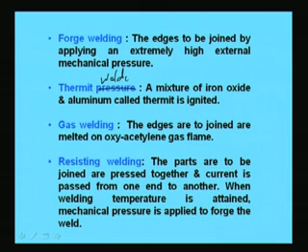In forge welding, the edges to be joined are connected by applying an extremely high external mechanical pressure. In case of thermite welding, a mixture of iron oxide and aluminum called thermite is ignited. Iron oxide reduced to molten metal is deposited at the joint.

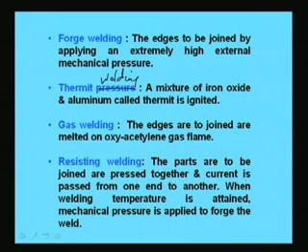In gas welding, the edges to be joined are melted on an oxyacetylene gas flame. In resistance welding, the parts to be joined are pressed together and current is passed from one end to another. When welding temperature is attained, mechanical pressure is applied to forge the weld.

The mostly used welding is electric arc welding, where heat is applied by means of an electric arc struck between the parts to be welded, and an electrode is held by a welder or automatic machine. During welding, the electrode melts and fills the gap at the joint.

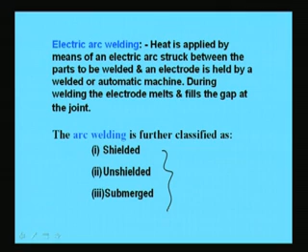The arc welding is further classified into 3 categories: one is called shielded, another is called unshielded, and then submerged. Now, according to their position, welding can also be classified. These are classified into 4 categories.

One is called flat welding, another is horizontal welding, then vertical welding, and then overhead welding. So according to their position we can classify the welding into these 4 categories. Out of these 4 categories, generally people are using flat welding mostly: flat welding, horizontal welding, vertical welding and overhead welding.

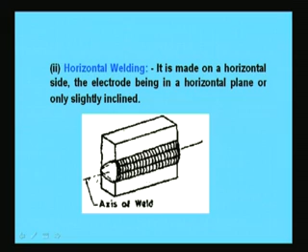Next, in case of horizontal welding, it is made on a horizontal side, the electrode being in a horizontal plane or only slightly inclined. The axis of weld will be in this way and welding will be in these cases.

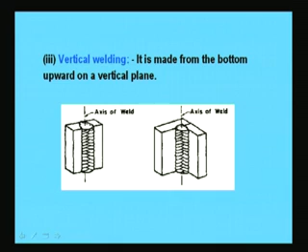Another is vertical welding. It is made from the bottom upward on a vertical plane. The axis of weld will be vertical, and the two members can be connected in this way, which is called vertical welding.

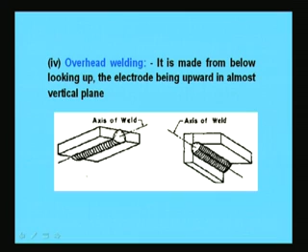Next is overhead welding. It is made from below looking up, the electrode being upward in an almost vertical plane. This is looking like this, the axis of welding will be like this or like this, and it is connecting in this way.

Now, among these 4 types of welding, flat welding is the easiest and overhead is the toughest. During fabrication, detailing is adopted in such a way that the overhead welding is reduced to minimum.

Now, while discussing welding, we must look into the advantages and disadvantages of the welding process, because we know we can join two structural members by riveting or bolting. So why are we going again for welding?

So before starting welding design, we must know the advantages over the bolted design and the rivet design, and then what are the disadvantages, that also we have to look into, and only then can the designer choose which type of joint will be required, which type of connections will be made.

Basically, we cannot suggest thoroughly that welding is better, or bolting is better, or riveting is better. It depends on case to case. So the type of connections we have to see first, then accordingly...

Before discussing details about welding, we should know the advantages and disadvantages of welding. We have seen how to connect two steel members by bolting or riveting. Now we will see how to connect these two members by welding. Welding connection certainly has some advantages, but also some disadvantages. Let us discuss these, so the designer can choose a certain type of connection for a certain type of structure.

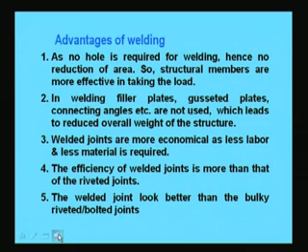Another advantage is the speed of fabrication is faster compared to riveted joints. Complete rigid joints can be provided with the welding process, which is another important advantage. The alteration and addition of the existing structure is easier compared to riveted joints. No noise is produced during welding, unlike riveting.

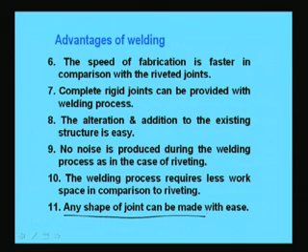The welding process requires less workspace compared to riveting. Any shape of joint can be made with ease. This is another important point the structural designer has to consider, since in the case of riveted joints it is a little difficult.

Now, what are the disadvantages of welding? The major disadvantage is that welded joints are more brittle, and therefore their fatigue strength is less than the members joined. This is one important thing to consider while designing the steel structure. Due to uneven heating and cooling of the members during welding, the members may distort, resulting in additional stresses developing in the member, which has to be taken care of.

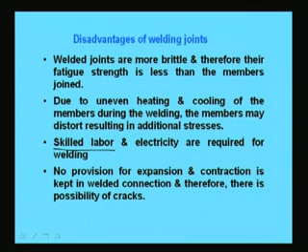Skilled labor and electricity are required for welding. We need skilled labor for connecting two members using welding. No provision for expansion and contraction is kept in welded connections, and therefore there is a possibility of cracks.

Another important aspect is that the inspection of welding work is more difficult and costlier than riveting work. Defects like internal air pockets, slag inclusion, and incomplete penetration are difficult to detect, so whether the joint has a fault or not cannot be easily detected in a welded joint. Because of this, failure may occur suddenly in a welded joint, and we cannot keep track, whereas in riveted joints this type of disadvantage does not come into picture.

Keeping all this in mind, the designer has to choose whether to go for a welded joint or a riveted joint.

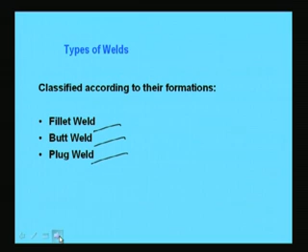Now, types of weld are divided into three types based on their formation, how it is forming. This one is called fillet weld, another is butt weld, and then plug weld. These three types of weld we will be looking at for designing steel members. We will see all this in detail later.

Now we will discuss some basic types of weld and their symbols, because when we go for designing the steel members, we have to know what type of symbol is used in drawing, so that the user can read it and make accordingly. Let us see how it looks like.

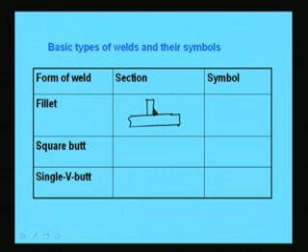In case of fillet weld, the section will look like this. Say one plate is connected with another plate with fillet weld, then if it is fillet weld, the section will look like this and the symbol will simply be like this. And in case of square butt, this will look like this.

This will be like this, so the section will be like this, and the symbol generally can be like this. Now, in case of single V butt, the sections will be looking like this.

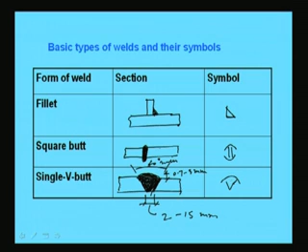This will be like a V shape with some rounding here, filled by the weld. Now, this round height is 0.7 to 3 mm. Then this width will be 2 to 15 millimeter, and this angle will be minimum 60 degree. And the symbol will simply be like this.

Now, if it is double V butt, then simply on two sides it will be like that. This is filled with weld, and the symbol will look like this. In double V, on both sides, this thickness will be around 3 millimeter and this other thickness will be 0 to 15 millimeter, and this angle will be minimum 60 degree. So the detail of the double V butt joint is like this.

Now, in case of single U butt, this will be looking like this. This is single U butt and this will be the symbol.

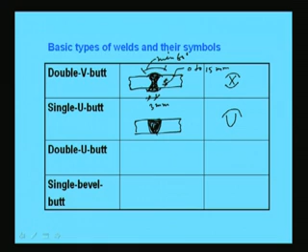Then in case of double U butt, similar to single U butt, it will only be on two sides, top and bottom. The welding will be there in this type, which is called double U butt, and the symbol will simply be like this.

In case of single bevel butt, the sections will look like this, and the symbol will be like this. So single bevel butt will look like this type.

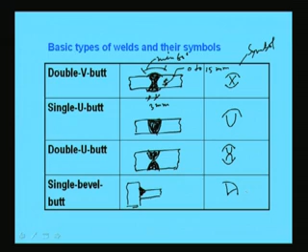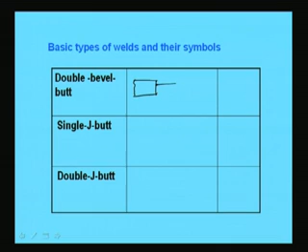Then double bevel butt will be on two sides, basically similar to single bevel butt, only it will be on two sides - this way and this way also. So the symbol will simply be like this.

And single J butt will be like this. The section will be looking like this and the symbol will be looking like this.

And in case of double J butt, similar to single J butt, the section will only be on two sides. And this will be looking like this.

Now we will classify the welding process into different categories. Say welding can be classified into three categories. One is called welding with pressure.

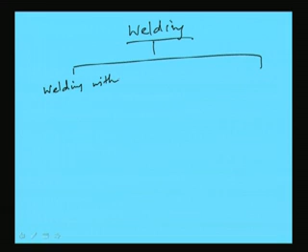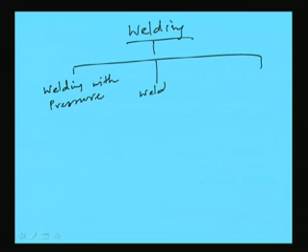Another is welding without pressure, which is also called fusion welding. And another category is brazing and bronze welding. So these three types of categories can be made, and this again will be of 5 types.

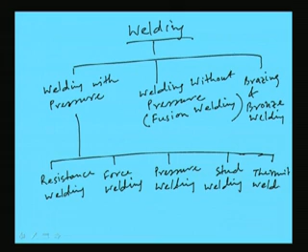One is called resistance welding. Another is force welding. Another is pressure welding. Then stud welding, and the last one is thermite welding. So these 5 categories are coming.

Then again, if we see, resistance welding can be classified into 4 categories. One is called projection welding.

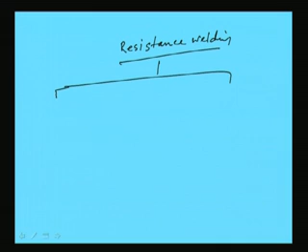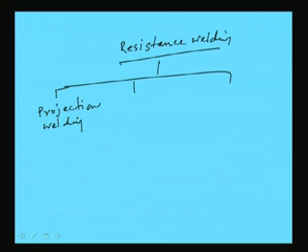Projection welding, then spot welding, next is seam welding, and the last one is flush butt welding. So these four types of resistance welding are there.

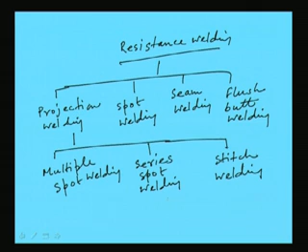Again, this projection welding can be divided into three categories: one is called multiple spot welding, then series spot welding, and stitch welding. So projection welding can be classified into three categories: multiple spot welding, series spot welding, and stitch welding. So this welding without pressure, which was defined earlier, can be classified into three types.

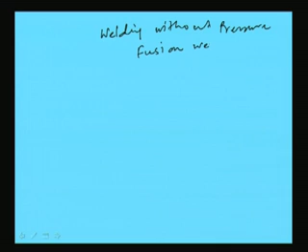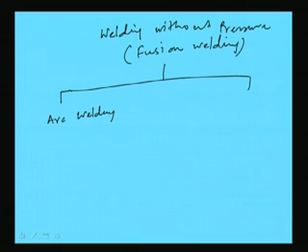That means the fusion welding. This can be classified into three categories: one is called arc welding, then gas welding, and then thermite welding.

This is fusion welding. Again, this gas welding can be divided into three categories: one is called oxyacetylene welding, another is oxyhydrocarbon welding, and the third is oxyhydrogen welding. So this gas welding can be classified into three categories: oxyacetylene welding, oxyhydrocarbon welding, and oxyhydrogen welding.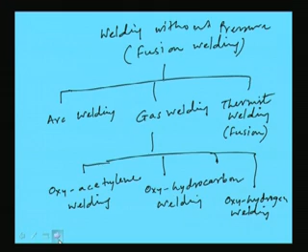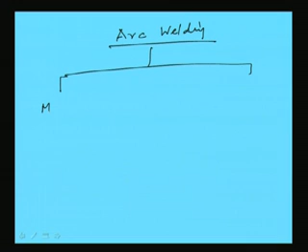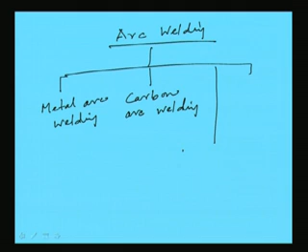Then again arc welding can also be categorized into four types. Arc welding can be divided into four types: one is called metal arc welding, then carbon arc welding, then inert gas welding, and atomic hydrogen welding. So this arc welding can be classified into four categories: metal arc welding, carbon arc welding, inert gas welding, and atomic hydrogen welding.

So we can summarize this way: welding can be categorized into three - welding with pressure, welding without pressure (called fusion welding), and brazing and bronze welding. Welding with pressure can be categorized into five: resistance welding, force welding, pressure welding, stud welding, and thermite welding. Resistance welding can be classified into four categories: projection welding, spot welding, flush butt welding, and seam welding. Projection welding can be classified into multiple spot welding and series spot welding, and seam welding can again be made into spot welding.

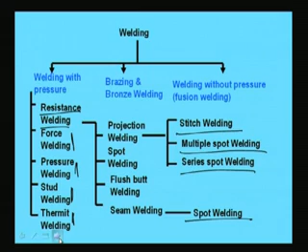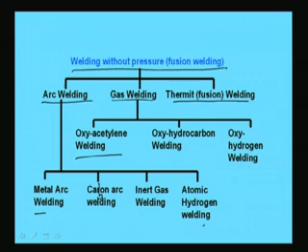Then this welding without pressure can be classified into three categories: arc welding, gas welding, and thermite or fusion welding. This arc welding will be metal arc welding, carbon arc welding, inert gas welding, and atomic hydrogen welding. And gas welding will be oxyacetylene welding, oxyhydrocarbon welding, and oxyhydrogen welding. So these are the different categories of welding.

Now, some drawing conventions we have to know - how to represent different types of welding in drawings, because the designer has to read from the drawing and implement it in construction. So this has to be known. Let us see how the drawing can be done.

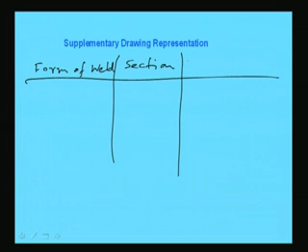One way is to make a tabular form: form of weld - what type of weld formation is going on; then section; and then drawing representation - how it will be represented in the drawing. So in case of flush butt welding, the form of weld will be flush butt, the section will look like this, and the drawing will be represented in this way.

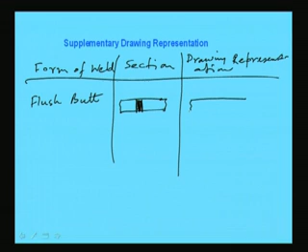This is very important, because in the drawing we have to understand how it has been represented and what it means. This is the representation of flush butt, plus this is flush square butt. So in this way the designer has to represent it in his drawing.

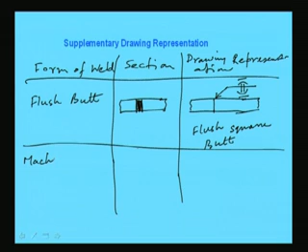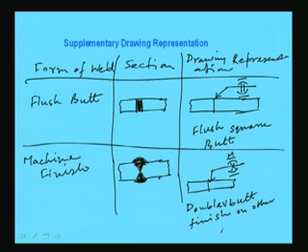Then say for machine finish - in case of machine finish, the section may look like this. Then in the drawing it can be represented like this. This will simply look like this, then it will look like this. So this is double V butt finish on the other side. In this way we can represent a few more welding types.

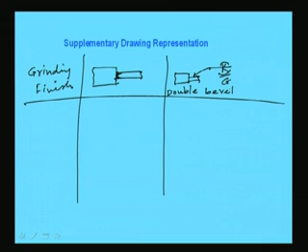The form of weld will be grinding finish, and the section will be looking like this. The section will be looking like this, and the drawing representation will be like this. This is grinding finish. So this will be like this, and this is basically double bevel butt finished flush on the arrow side.

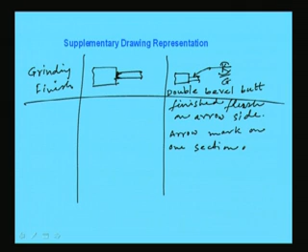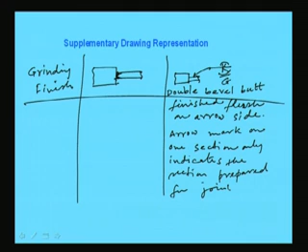Here, the arrow mark on one section only indicates the section prepared for the joint. So in this way the drawing representation will be there. So another type of weld will be convex fillet. The section will be looking like this.

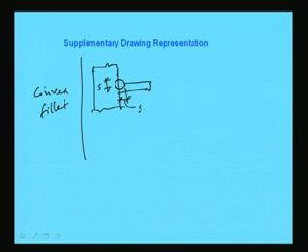Now, this will be basically convex. It will be something like this. So this will be S, which is called size of weld. This will also be S. This is size of weld, and the throat thickness, which I will discuss later in detail, will be called throat thickness T. This is throat, and this distance will be throat thickness, which I will discuss later in detail. Now the drawing representation will be very simple.

It will be like this. Then you have to put an arrow mark, and then you have to indicate S with convex fillet. So this will look something like this. In this way one can represent it.

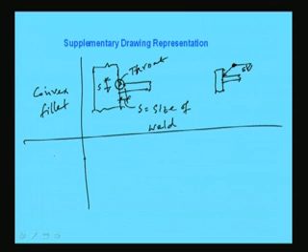Another one is the difference we can see here, concave fillet. This will look like this. So basically it will be the same type, only concave weld will be there. This will look like this, then it will come, then it will be like this. So this will be concave. So this will be the size of weld, and throat thickness will be this one.

So this will be, so the section will be like this. This is size, this is again size of weld, and to represent in the drawing this can be made like this. So in drawing we can easily represent, only thing is we have to know the meaning of representation, how it is done.

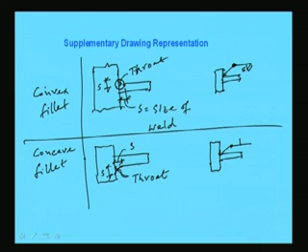Now, this is looking like this, this is concave. So concave sign will be given. Here black circle indicates that field weld, black circle here will indicate the field weld. Another is weld all round, the form of weld is weld all round. If it is like that, then the section will be like this.

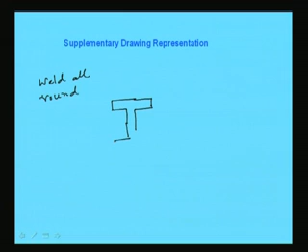So suppose one I-section is given. Now, if I see in three dimensional, it will look like this, and this will be forming in this way. These are basically forming by weld all around. This will be... so this will be like this. So that basically forms all around.

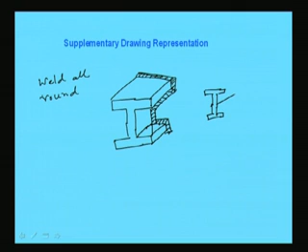So the drawing representation will be simply like this, just you give the I-section and then just define like this. This representation has been made basically to simplify the drawing, because in the drawing it is not possible to make all the details. So if one knows the conventional things, then the user can easily read the drawing and can make the things properly.

This circle indicates fillet weld all round the section. This circle is indicating that fillet weld is all round the section. So in this way, in a very simple way we can represent a complicated one, and the construction engineer who is going to construct the steel building can use the drawing and accordingly make the things properly.

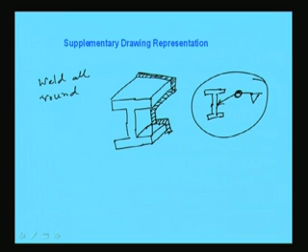Now we will discuss about details about fillet weld. We have seen that there are different weldings: one is fillet weld, another is butt weld, then plug weld. So basically when two plates are placed, we generally use fillet welding. A fillet weld can be specified by the following parameters: size of weld, its throat thickness, and the length. So when we talk about fillet weld, we mean what is the size, what is the throat thickness, and what is the length of the weld. So these three things we have to know while using the fillet weld.

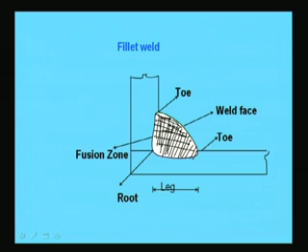So the fillet weld can be shown in this way. This is the weld which has been made to connect two steel parts. Now, if we see, this is called toe, this part is called toe, and this is basically the weld face of the weld. So welding will look like this, basically two parts we are going to connect. So this is toe and this is weld face, and this is basically the fusion zone, and this point is called root. So the leg will be this one, we can call this leg, and this side also we can call as leg. So we can make it. So in this way the fillet weld can be represented.

Now, what is the size of the weld? The sides containing the right angle of the fillet weld are called legs, as I have shown in the previous slide. The size of the weld is specified by the minimum leg length. So the minimum leg length will be the size of the weld. The leg is the distance from the root of the weld to the toe of the weld, measured along the fusion face.

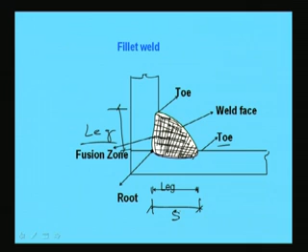So here you see, from the toe to the root, this is called leg, and the smaller of these two legs will be the size of the weld, which is represented by S. Size of the weld we used to call S.

As per the codal provision, some minimum size of the fillet weld has been given. In code IS 9595:1996, in the annexure A.2.1.8, the minimum size of fillet weld has been given. This minimum size depends on the thickness of the thicker part of the member. Thicker part of the member means, if two plates are joining, the thicker part of the member will be the one we have to consider.

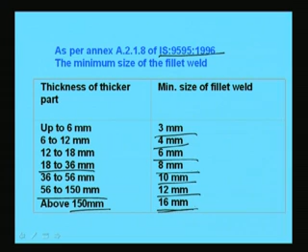So minimum size of fillet weld will be: for up to 6 mm thickness, it will be 3 mm. From 6 to 12 mm thickness of the plate, minimum size of the fillet weld will be 4 mm. For 12 to 18 mm thickness of the plate, the minimum size will be 6 mm. If the thickness of the plate becomes 18 to 36 mm, the size of the fillet weld will be 8 mm. For thickness varying from 36 to 56 mm, it will be 10 mm. Similarly, for 56 to 150 mm, it can be increased to 12 mm, and if the plate is above 150 mm, then minimum size has to be given as 16 mm.

Now you have to note the following points. One, when the minimum size of the fillet weld is greater than the thickness of the thinner part, the minimum size of the weld should be taken as the thickness of the thinner part. You have to remember this point. Another point is, when the thicker part is more than 50 mm thick, special precautions like preheating etc. will have to be taken care of properly. This is another important part while joining two plates with welding.

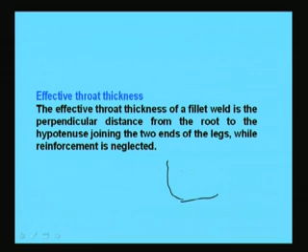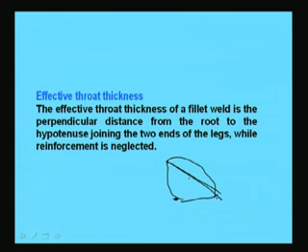Now another parameter important in welding design is the effective throat thickness. Basically, the effective throat thickness of a fillet weld is the perpendicular distance from the root to the hypotenuse joining the two ends of the legs, while reinforcement is neglected. That means, if our weld is something like this, then the perpendicular distance from the root, this is the root, this will be the perpendicular distance from the root, so this will be the effective throat thickness.

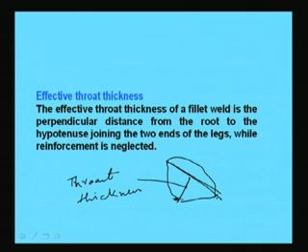This can be calculated approximately. Let us see: in case of effective throat thickness, if this is the size of weld S, then this is also size of weld, so AB and BC will be equal, which is size of weld. So we can find out the length of AC. AC will be nothing but the square root of AB square plus BC square, that means S square plus S square, so AC will become finally root over 2 into S.

Now, as this is a right angle, we can find out the throat thickness T. This distance BD is called throat thickness, so BD can be found out. AD will basically be half of AC, and AB is S. So BD can be found from this triangle ABD: AB square equals AD square plus BD square, so BD, this distance, will be root over AB square minus AD square.

So BD will be root over S square minus S by root 2 whole square, because AD will become S by root 2, since AC is root 2 S, so AD is AC by 2, that means S by root 2. So BD will become finally S by root 2 after calculating this, which is 0.707 S. So BD, called throat thickness T, comes out to 0.7 S approximately. So throat thickness of the fillet weld can be defined as 0.7 S, where S is the size of weld. In this way we can calculate it.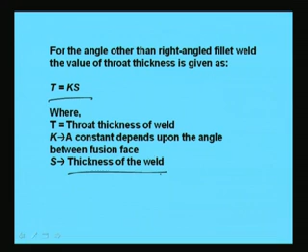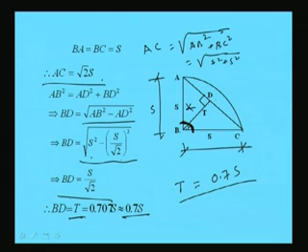This angle may not always be a right angle as shown here. If the angle differs, how the throat thickness varies is described by the code. If the angle between the fusion face is between 60 to 90 degrees, the constant K will be 0.7, so T equals 0.7S. If the angle becomes more than 90 degrees, say 91 to 100 degrees, K becomes 0.65. This is given in Table 2 of IS 816.

In this code it is given: if the angle becomes 101 to 106 degrees, the constant becomes 0.6; if the angle between fusion faces becomes 107 to 113 degrees, it is 0.55; and for 114 to 120 degrees, the constant becomes 0.5, meaning T becomes 0.5S in this case.

So the throat thickness of the weld can be found either from this table, or if it is not given, assuming the angle to be 90 degrees, we can take T equal to 0.7S, the way we have calculated.

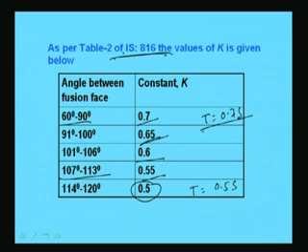Now another important parameter is effective length. The effective length of the fillet weld is the length of the weld for which the specified size and effective throat thickness of the weld exists. That means the effective length will basically be the overall length minus 2S.

So when calculating the length for design purposes, the effective length will be the overall length given minus 2S. The effective length should not be less than 4 times the size of the weld—this is another condition given by the code, that the minimum length should be greater than 4S, where S is the size of the weld. If it is not, then the size of the weld must be taken as 1/4 of the effective length.

Finally, the designer has to remember that the overall length will be more than the effective length. So whatever effective length is coming, you have to add 2S to get the total length, the overall length L. So L becomes L plus 2S, where S is the size of weld and L is the effective length. When we get the effective length, we have to increase the overall length by 2S.

Now, the maximum size of fillet weld guided by the code: the maximum size of fillet weld will be the thickness of the thinner plate minus 1.5 mm. If it is connected by an angle, then it will be 3/4 of the nominal thickness of the angle.

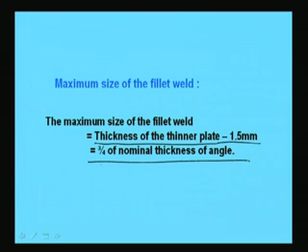Now we will discuss the design of fillet weld, but before that we need to know a few terms used for designing it. The first three have already been discussed: the size of fillet weld termed as S, the throat of fillet weld meaning T, and the effective length of the fillet weld, where L equals the overall length minus 2S, and T equals 0.7S generally.

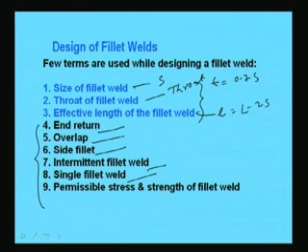Now there are other terms we have to know while designing members using fillet welds: one is called end return, another is overlap, side fillet, intermittent fillet weld, single fillet weld, and permissible stress and strength of fillet weld. We need to know these in detail, otherwise we will not be able to design the fillet weld properly.

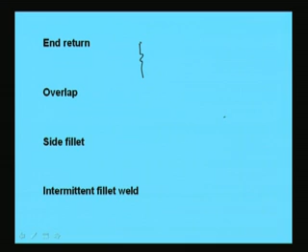One term is end return. Let us see what end return is. If one plate is joined with another, and welding has been done here, the portion up to here is called the return end.

That means the fillet weld terminating at the end or side of a member should be returned around the corner whenever practicable for a distance not less than twice the weld size. This distance will be at least 2s, it should be more than 2s.

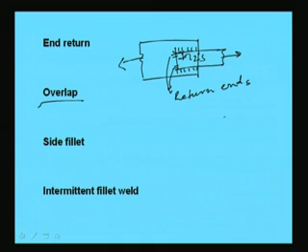Another term we use is called overlap. Overlap means when two plates are joined by some overlapping, and force is acting in this, then this is called lap. This overlap should not be less than 5t, where t is the thickness of the thinner plate.

Next is intermittent fillet weld. The intermittent fillet weld length should not be greater than 12T when under compression, and should not be greater than 16T for tension, and in any case should not be greater than 20 centimeters, where T is the thickness of the thinner plate.

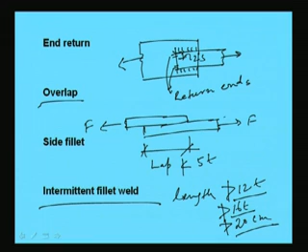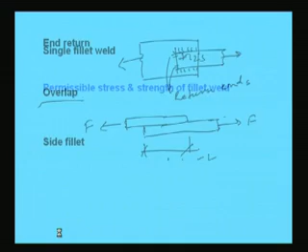Another term we use is called single fillet weld, a single line of fillet weld. Single fillet weld should not be used while subjected to bending. So we have to remember, when the members are subjected to bending, we cannot use this single fillet weld because it cannot take care of that.

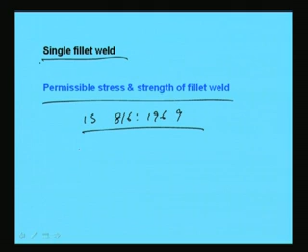Another important parameter is the permissible stress and strength of fillet weld. As per IS 816 1969, the strength of the weld can be calculated as P equals pq into l into t, where t is throat thickness, which can be calculated as K into S, where K is a constant depending upon the angle and S is the size of weld. From this we can find out the throat thickness.

L is the effective length of the weld, that means basically the overall length minus 2S, and PQ is the permissible stress, taken in general as 108 MPa for welding cases. So P, the strength of fillet weld, will be PQ into L into T. From this formula we can find out the strength of the weld, and accordingly design the joint.

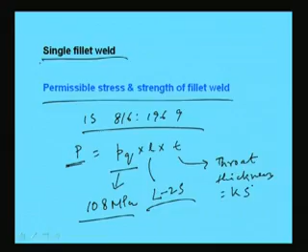So in today's lecture we have emphasized on welding connection. We discussed the different aspects, advantages and disadvantages of welding. As per the requirement of the designers, we have to choose the process of welding, and different types of welding processes were discussed, along with different drawing representations for different cases of welding, from which one has to understand the meaning of the drawing.

And accordingly what we have to make in case of construction, those things from the drawing we have to understand, and how to design a fillet weld we also discussed today, basically how to find out the strength of the fillet weld, given by the formula P equals PQ into L into T, where PQ is the permissible stress, L is the effective length and T is the throat thickness. We also discussed effective length, throat thickness, size of weld and other required parameters. Basically we have emphasized on fillet weld.

So next class we will design a connection using fillet weld, and how the strength can be calculated in a connection, that we will discuss in the next class. Thank you.